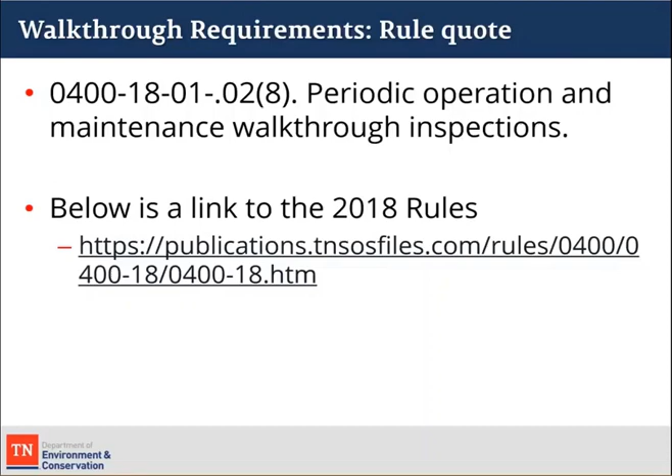A rule quote for this portion of the walkthrough is 0.02, Section 8. If you'd like to see those rules, you can get mesmerized by them if you look at them long enough. A link is below to be able to look at the entire scope of our rules.

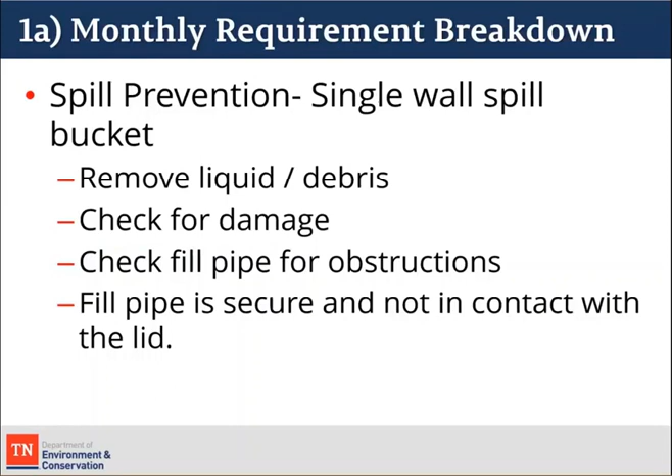All right, so our monthly requirement breakdown: spill prevention for single wall spill buckets. We ask that on our form you remove any liquid debris, check for damage, check your fill pipe for obstructions, and make sure your fill pipe's secure and not in contact with your lid.

Since this form is finalized now, I've tried to include all the applicable sections from this form for each of these sections of slides that we'll go through. So items 1, 2, and 3 on the new form encompass the requirements I just talked about. You'll have a box to initial for each of these questions once you're able to check them off each month. Hopefully this saves everybody a lot of organizational problems as far as keeping up with 4 or 5 different forms—everything is on one form for pretty much everything you have to do at every facility. So again, 1, 2, and 3 goes along with single wall spill buckets.

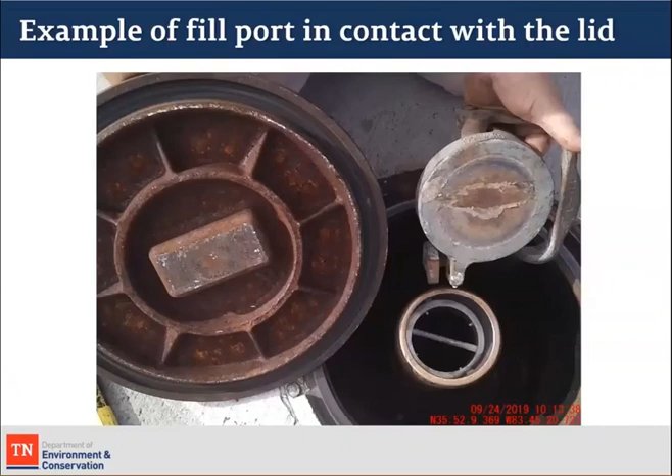All right, so some examples of things you may run into in the field. This is a photo of a spill bucket lid that's in contact with the riser cap—you can see there's some wear on both of them. This is an example of a damaged spill bucket; everybody's seen them, nothing new here.

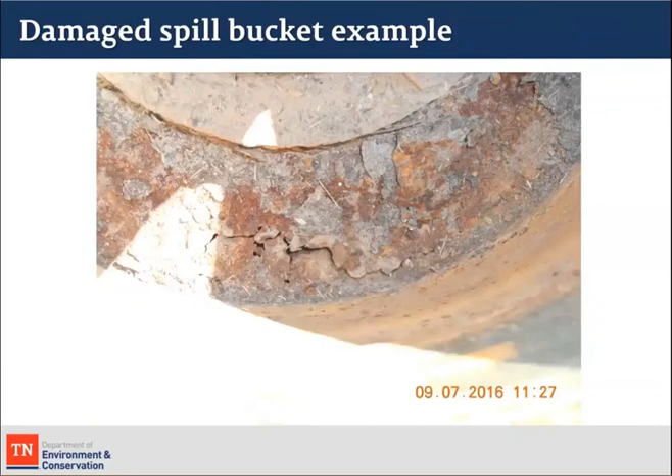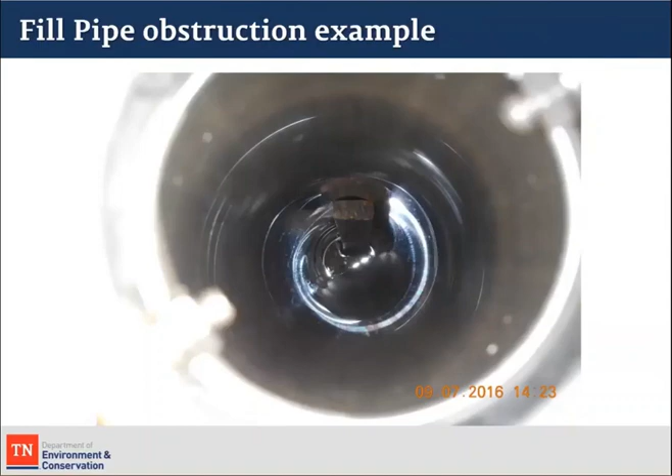If you happen to see a stick or something down in your fill port, you definitely want to remove that and make note of it. There could be anything in there—rags, anything. So check it; this is something that's sort of new, so we want to emphasize that you need to look down in there if you're doing monthlies for one of your tank owners.

Okay, so the monthly requirement breakdown with double wall spill buckets—there are some ways to get out of doing the operability testing. If you have electronic sensors and you monitor them with the interstitial monitoring protocols, and you keep an alarm history and a monthly sensor status report, then you can avoid doing operability testing.

This is also the case with a standalone sensor. If you don't have an ATG and you just have a standalone sensor with a monitoring device just for the sensors, you can also avoid that requirement as well.

The liquid float gauges still will require operability testing. A footnote for all of this is spill bucket operability testing is not part of monthly release detection or monthly leak detection by rule. So it's not the same as monitoring a sump—it's not looked at the same, it's not release detection. Whereas monitoring the sump is the release detection for your piping, monitoring a spill bucket is not the same.

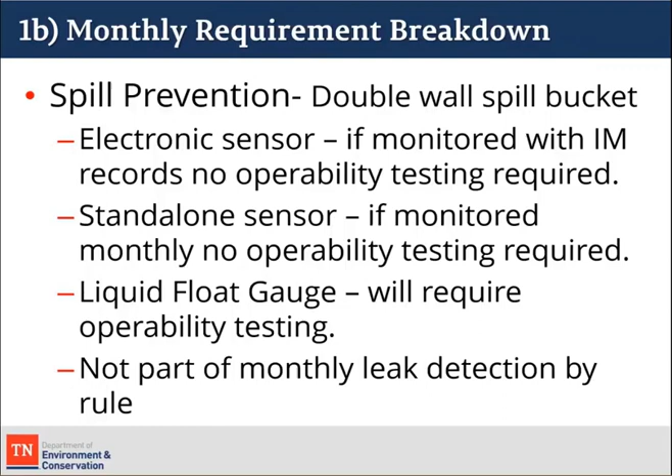I want to make sure I make this as clear as possible: if somebody does mess up, it's not the same criteria. Enforcement doesn't look at it the same, it's not even the same rule, quote, if it is a violation. It's just like missing a month of doing your spill bucket and dispenser logs previously. So it's not like it's a level 1 or anything.

Okay, so for the form, number 4 is the applicable section for this. And like I said, you just finish out the check boxes each month, initial, once you've covered all these questions.

Okay, so this is a double wall spill bucket. Everybody's seen one with the float gauge in it. This one's actually failing, so it would require some attention. The sight gauge in there, I'll reiterate, is not the same as having an electronic sensor in there, and will not keep you from having to do your operability testing on a spill bucket.

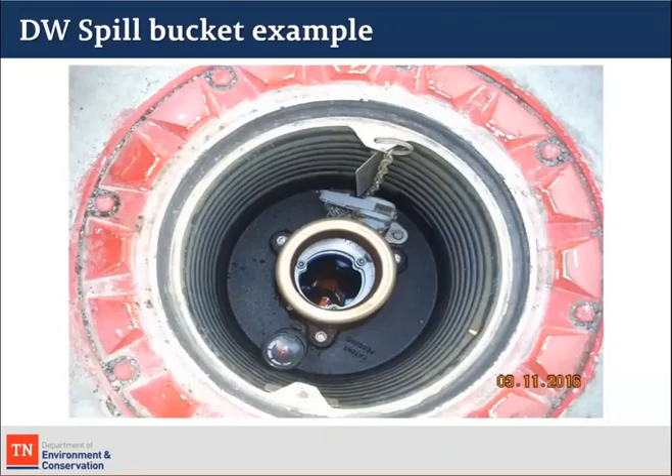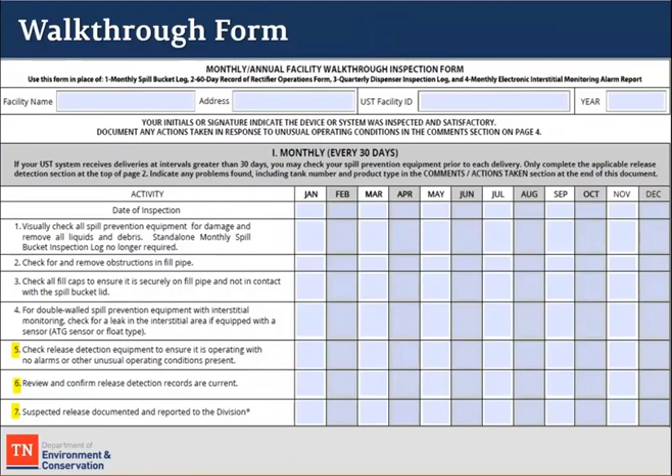So you'll be asked to check release detection equipment to make sure it's operating with no alarms or unusual operating conditions each month. You'll review and confirm that your records are current, and once you do that, you'll check your box. I always recommend keeping all your records with this form if you're doing compliance for a tank owner, because that way when we come, everything's organized and together, and it just makes for a faster and less confusing inspection. Number 7, any suspected releases, document and report to the division as required.

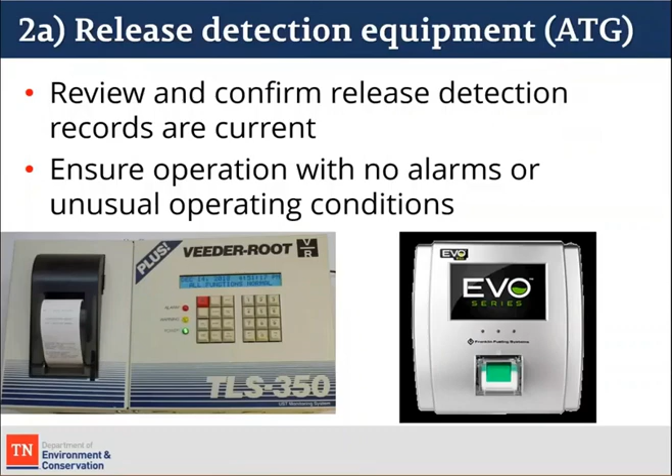All right, so for ATG, you've got to review your release detection records, make sure they're current, make sure you've got a pass for each month. Nothing's changed there as far as the requirements of what you have to have. We just have a spot on our walkthrough form for you to check that you've done that each month now. Make sure no alarms and unusual operating conditions, and make sure to let the division know if that is the case.

For statistical inventory reconciliation, review your reports each month. Make sure your drop tubes are present. I know it's uncommon, but I have seen a couple of times during inspections where a drop tube has been removed for whatever reason. I don't know if somebody steals them for the metal or what, but anyway.

Record your water level readings each month. That seems to be something that is easily forgotten with this method, is to check for water each month. A lot of tank owners, for whatever reason, forget to do that portion.

Also, be sure to include your inventory raw data with your monthly report. That's the sheet that they use daily to record their beginning stick readings, their sales, and all that raw data. Make sure you include that because the inspectors will ask to see that most of the time.

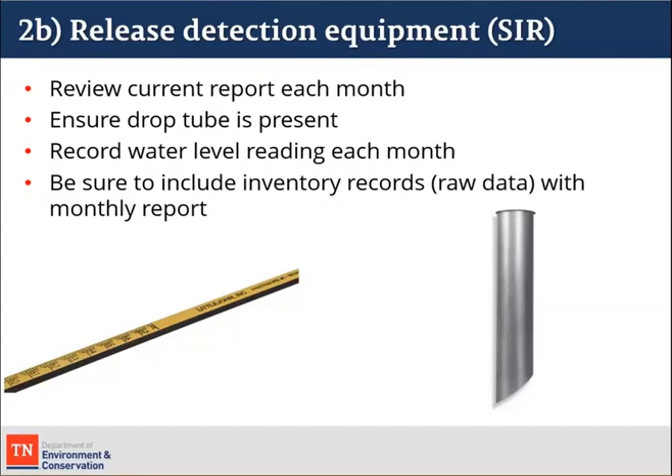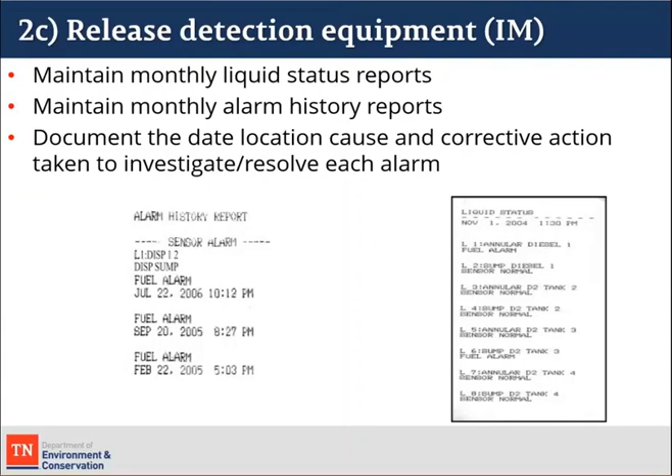Okay, for interstitial monitoring, maintain your monthly liquid status reports and alarm history. Both of those are required. And like I said earlier, I recommend just keeping all that in an envelope with this form. That way, when you're ready for an inspection, you've got everything together, and it's a lot smoother to go through.

Document the date, location, and cause of any corrective action taken for any alarms that you may occur on the back 2 sheets of our annual walkthrough form. There's a lot of extra space for you to document anything you've had to do at the facility. So if you've got, let's say, 5 gallons of water out of the STP sump and reset the sensor, this will be where you would record what you did and how you addressed any alarms.

Okay, manual tank gauging. This is such a rare method of release detection in Tennessee that I'm not going to spend a lot of time on it. If you do have a facility that uses this release detection, I recommend getting with your local field office, contact Don or myself if you have any questions. This chart is straight from our standardized inspection manual to show what qualifies and what doesn't qualify as far as how you can perform this method of release detection.

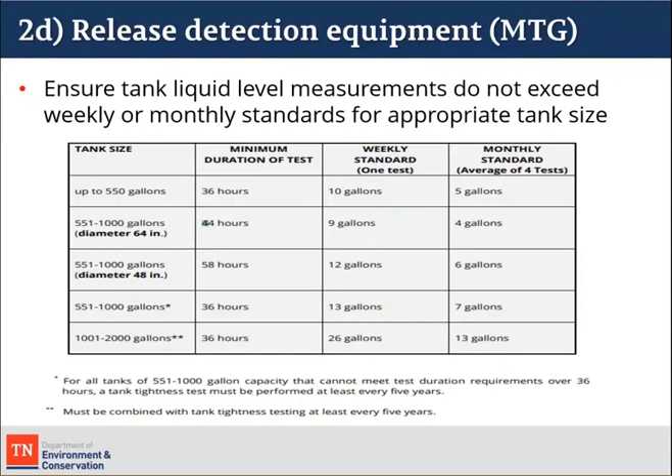Okay, so for the walkthrough form on the monthly section, we've got each method broken down. The form contains everything because it's going to be all-encompassing for every facility out there. So if you have a facility that has an ATG and utilizes that for their primary method of release detection for their tanks, you check the ATG box and then fill out those 2 questions associated with the ATG.

Same thing with SIR. You check that section, and then each month you answer those 4 questions, and as long as you have all that information, you'll meet your requirements. Hopefully this is going to help people avoid violations. Only time will tell on that, but I think it's a lot clearer what's required by having this form. As long as you complete the form, you should meet all the requirements to stay in compliance.

Okay, so interstitial monitoring. Now there are some things obviously that fall outside of that, equipment-wise and things like that. But as far as release detection requirements, everything that's asked for in here will help you meet that requirement.

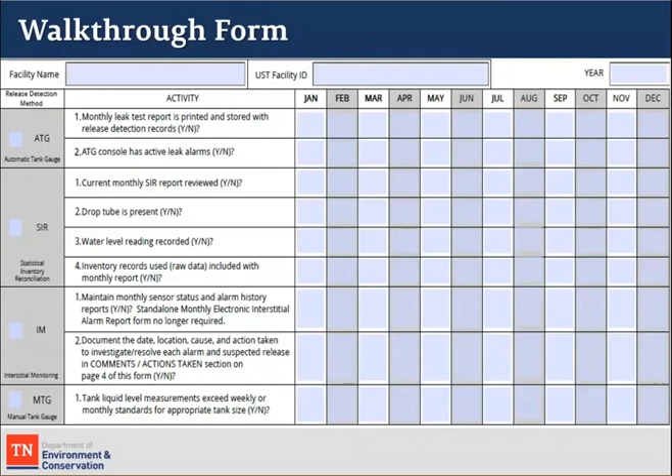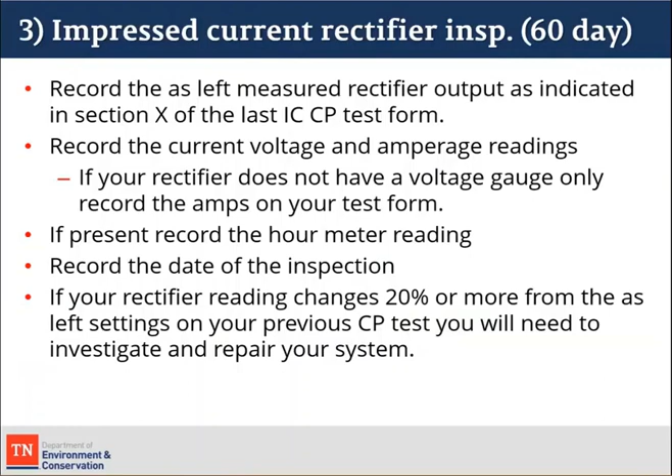Okay, so impressed current. Rectifier inspections are every 60 days. Nothing's changed there. We want you to record the as-left measurement on the rectifier, and I'll go over that on the form in just a second. You also want to include your current voltage and amperage readings that you see the day you do your inspection. If you've got an hour meter, record that as well, and then put the date of the inspection on the form. Also, if your rectifier readings change 20% or more from the time of your last test, at any point during that 2 or 3 year period that your test is valid, you need to investigate and have somebody qualified come out and check that output of the rectifier to make sure it's still protecting the tanks adequately.

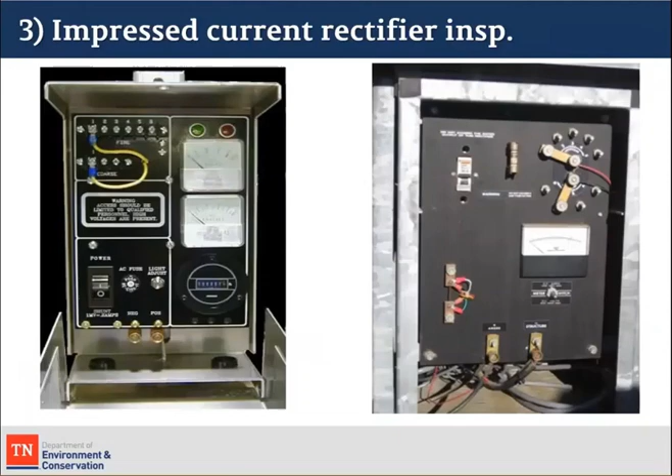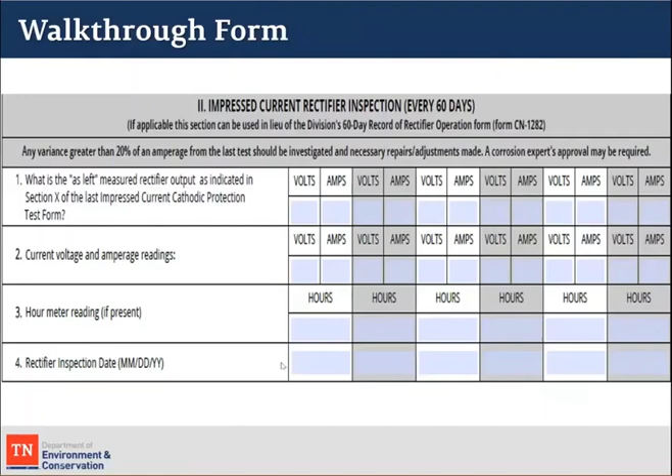Okay, so here's the section on the form that I was talking about. Your as-left measurement will go in these 2 boxes, and you'll just copy it every 60 days because it's going to be valid for 3 years. That number will be, unless you have to have a test, in the interim for a variance of 20% or more. Then this is where you would put the day you're out there, the volts and amps if applicable, hour meter reading, and the inspection date. So that's pretty straightforward.

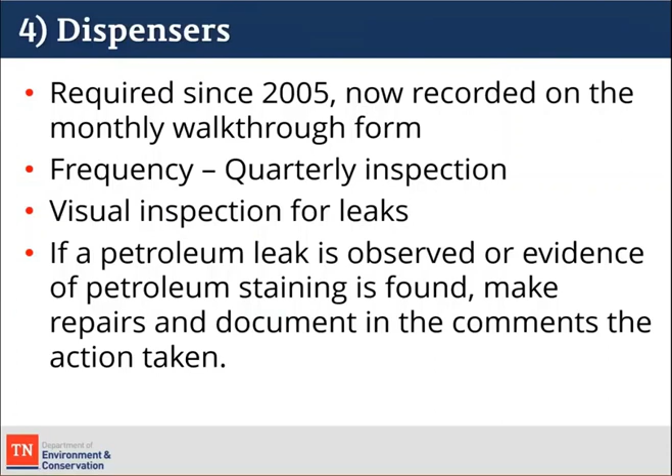Okay, so dispensers, nothing new here much. Since 2005, we've required this. Now we're just asking to record it on the monthly walkthrough form. And then it's a quarterly inspection. That's not changed. I want you to visually inspect for leaks. And if you do see a leak or notice any petroleum staining, make the repairs and document in the comments what you did to make that repair.

This is just an example of a potential scenario that you'll run into with a leaking diesel dispenser. It's got a couple of seals that have probably gone out somewhere. You get a little drip here, and one hanging from each one of the bolts on the bottom of the meter.

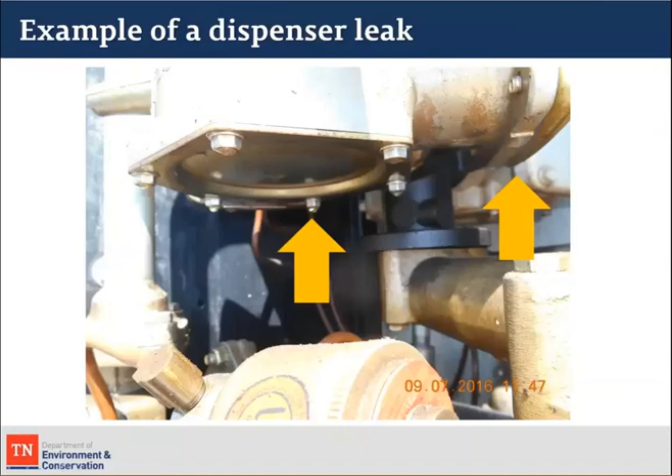So this is the portion of the form that involves the quarterly inspection of the dispensers. It's pretty much the same as the previous form, just in one smaller section on our walkthrough form. We just ask that you initial and date the day that inspection is completed.

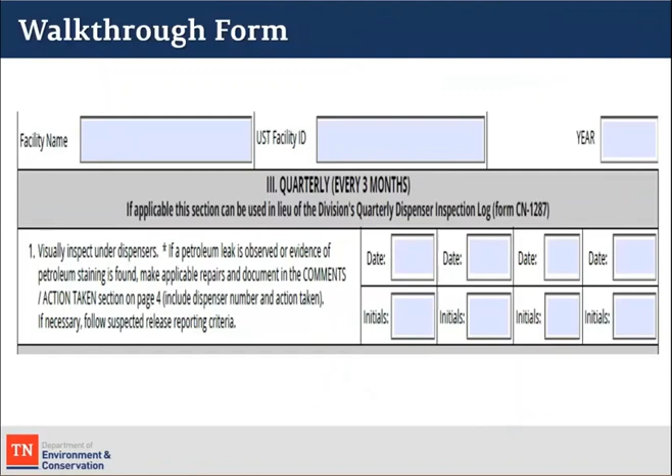All right, so jumping to annual requirements. We've finished all the monthly requirements. Mark, was there any questions in the chat or anything on the monthly before I jump to the annual section?

My mouse went away for a second. No, I do not see any questions so far, so perfect. Thanks for the pause, but carry on. Awesome.

All right, so annually you need to check for damage of the floors, walls, and the lids of the sumps, any seals, boots, penetrations, cracks, any separation. Most importantly, and it's overlooked quite often, is that the sensor is located at the lowest point portion of the sump. A lot of times, on this bottom right picture here, you'll see there's an elevated section where all your risers come out of the tank, and you'll see that sensor sitting there instead of on the side where it should be. That gives you about 4 or 5 inches of liquid in there before it ever gets to the sensor to activate it. So we ask that you set it at the lowest portion of the sump so it can be alarmed as quickly as possible.

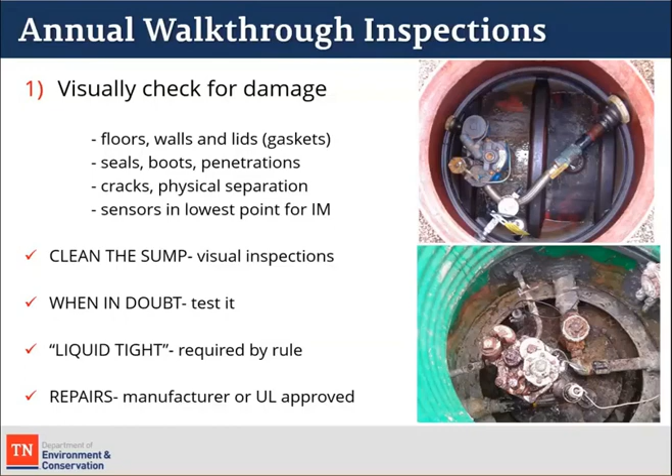Also check your penetration fittings, piping joints, conduits where it enters the sump, pump risers, lids, gaskets, test boots - make sure they're open. Close them for your hydrostatic test, obviously, but once you finish the test, make sure you open everything back up so you've got an open system again, because if you forget to do that, it just opens up violations whenever we come around the next time.

Also, compatibility is a pretty big thing that we're starting to look at more than previously, to make sure ethanol percentages are on the rise - not necessarily in Tennessee yet, but E15 is pretty much in every state that surrounds us. For whatever reason, we don't have it here yet. But flex fuel and E85 blends have been around for quite some time, so there are compatibility issues with upgrading existing tanks to anything greater than 10%. Make sure you check all that before you switch somebody over.

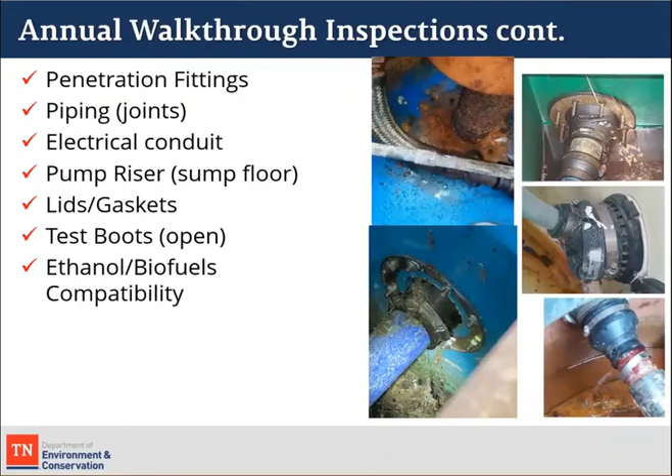Piping degradation is something we're starting to see with pretty much every flex pipe manufacturer that's over 20 years old nowadays. It's just starting to degrade, either by being in contact with water often, or product in the sump. But for whatever reason, we are starting to see more degradation of the flex pipe that's in the 20 to 30 year range of age.

Typically, you find this in sumps without sensors, obviously, because if the water or petroleum is causing it, a sensor would alarm, and you would be able to remove that a lot quicker than if you only look at it once a year.

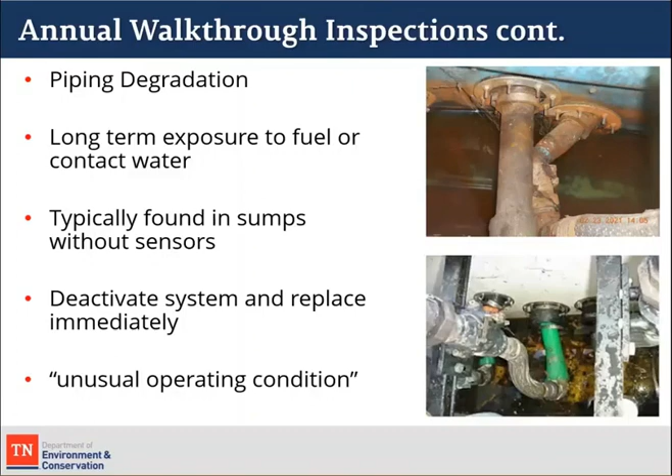An unusual operating condition is not just the pumps are running slow. Visual or performance based, it's clearly defined in the regulations with examples. But if you see it and it's not right, report it. That's the basic premise trying to be accomplished there.

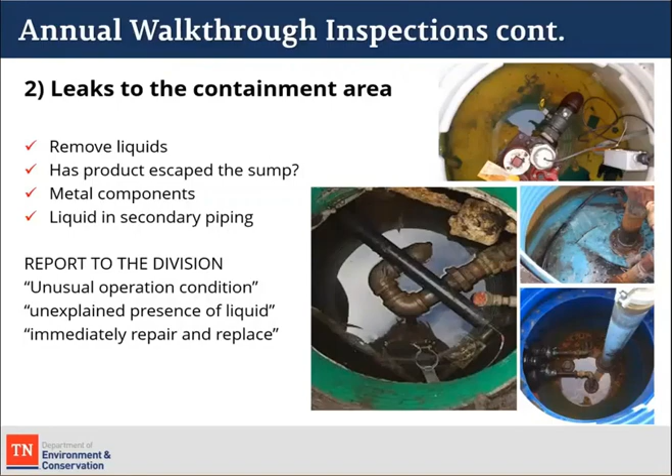All right, Dustin, could you advance the slide for me? Again, or did it should not go through yet? Well, this one, or this, keep going. One? Okay. I haven't went this far yet. Okay.

Prior to conducting a secondary containment inspection, I think Dustin's been pretty thorough about covering this previously. How can you, it's impossible to know what's in that sump unless you can visibly see it. So we've preliminarily seen some walkthroughs conducted on sumps where our inspectors can't even see the sump floor. That obviously is an issue. Questioning the integrity of the sump is difficult to do if you can't see it at all.

So we're encouraging people to clean those sumps as practically as possible. Talking under dispensers, filters, anything that's in there that's loose or doesn't belong there needs to be removed. And secondary containment boots should be in place and open to the piping.

Secondary containment, that's a critical component of interstitial monitoring. If the secondary is not open for communication to the sensor for liquid to flow through, then you're ultimately not going to be able to detect a release in that containment.

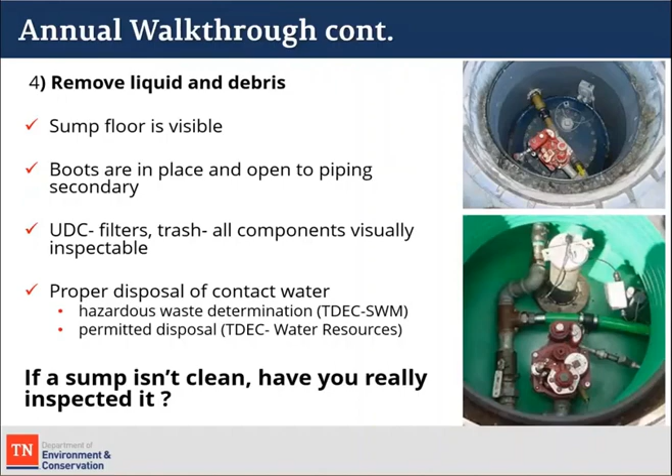Another option that the industry has brought forward is the double wall containment sump, which we don't see a lot of in Tennessee at this time. It is beginning to be a commonly seen technology as we see more larger systems get installed statewide, because double wall containment sumps do allow you to avoid the triennial testing requirements for containment sumps.

This is as long as they are monitored with a mechanical or electronic sensor using one of the technologies, either with a brine filled secondary or vacuum filled secondary, instead of hydrostatic testing on those sumps.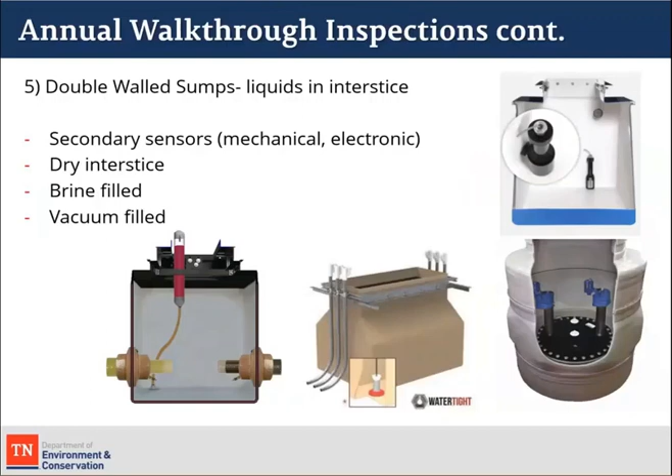One of the components of monthly leak detection for a site that's using SIR is, of course, a gauging stick, and this really should be present at every facility. It's a critical component for receiving fuel deliveries, knowing your before and after stick reading, and the tanker doesn't always have one on it. So if you want your drivers to give you accurate deliveries, that's the main reason for mentioning it here.

We realize most of the modern facilities doing interstitial monitoring or tank monitoring are not required to have a gauging stick. But if you do have one, check it regularly, make sure that it's legible, the button's present on the bottom, and that the lacquer coating on the outside is still intact.

Verifying the tank chart is specifically for sites conducting SIR, but it's a recommended practice for anybody. Checking with water finding paste and ensuring that the site has a calibrated tank chart is a critical part of the walkthrough requirement on an annual basis for a site that does SIR.

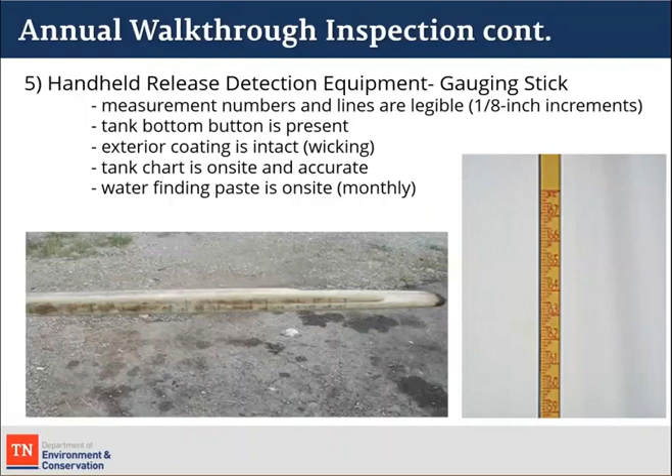Don, I do have a question. Sure. From Michael Koblitz: is it the contractor's responsibility to report the issue?

Well, the regulation is specific to owners and operators. So as the rule is written currently, the owner and operator is primarily responsible for reporting issues to the division. I assume Michael asked that question because if they do encounter an issue, are they required to report it? The answer is they're required to formally notify their owner and operator that there's an issue. Then the reporting requirement falls on the owner, not the service provider.

Hope that answers your question, Mike. All right, let me open this mic up. Michael, I think I've got you unmuted now. Okay, well, I will respond to him in chat, in Q&A.

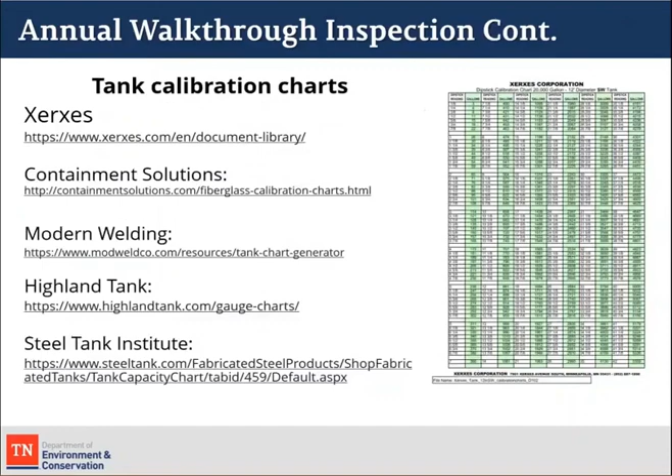As we mentioned during previous presentations, SIR is still a critical leak detection method in the state of Tennessee. It's in use in approximately 30% of our sites.

As owners use SIR, they found that throughput is a critical component. More gas that goes through a system, typically the less stringent, it's still an accurate method and still meets all certification requirements. But as the throughput on a tank increases, you're subject to less and less stringency with this method, just as you are with any others.

If you have a site that's selling 8,000 gallons a day, a 30-gallon loss is much easier to miss, even with accurate stick readings. So that's why we ask

all operators to be thoroughly familiar with this process. I know it's part of A/B operator training. If it's not part of C operator training, it certainly should be. Hand in hand with the gauging stick, tank chart, and water paste, every site should have one. Every site should have their operators trained how to use them.

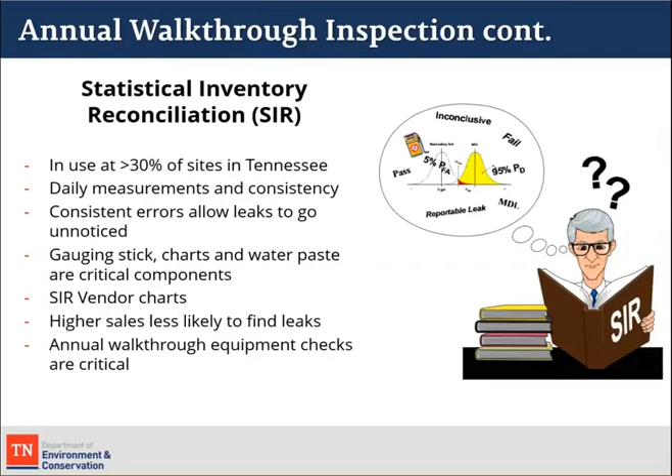The annual walkthrough requirements on these are just as important as checking the tank. Visually checking containment sumps for damage, that's always a priority. Removing liquid and debris from those containment sumps where it's found should be done as soon as practical. And if monitoring is being performed, be sure to check for leaks between the double wall containment sumps.

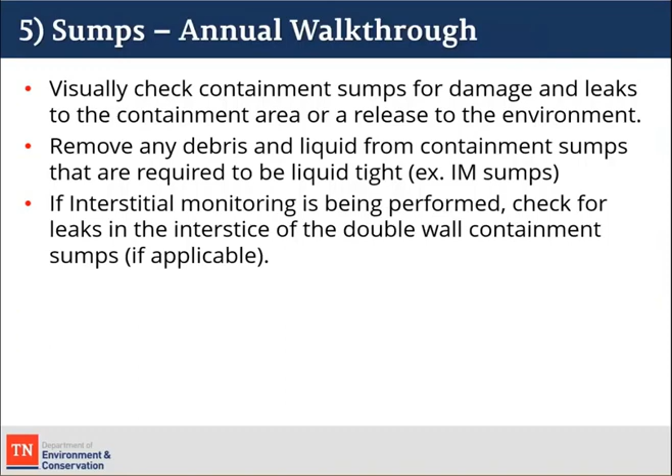I think I've had this discussion before with several owners and operators. If you have a monitored containment sump, then... I just drew a blank on why this slide's still even in this one. Go ahead, Dustin.

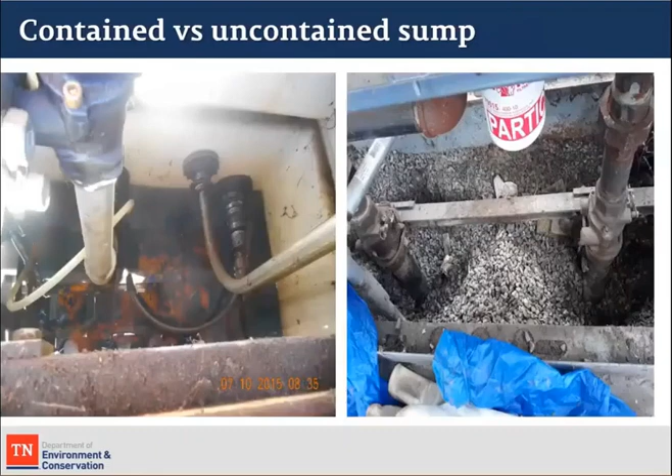I think I remember now, because what we're talking about here is eventually we're going to get into the reporting requirements. Standing liquid of any kind in a sump whose integrity has not been verified -- if I look at this example on the left and I see that liquid goes up to the lowest penetration fitting in that sump, this site may not have a sensor. If that's the case, then we have to have a procedure in place, such as hydrostatic testing, to verify that this containment sump did not release liquid fuel into the environment. Obviously, with the one on the right, any evidence of staining or a significant amount of leak may warrant the inspector to investigate further.

This is a question we get a lot from contractors that have piping, flex connectors, swing joints, or any metallic piping component that's in contact with water in a containment sump. Is that sump used for interstitial monitoring? If not, then maybe the addition of cathodic protection is the only necessity. So if that sump was installed before July 2007 and that piping system is not being used for IM, then your only priority at that point is ensuring that the metal components in that sump are protected.

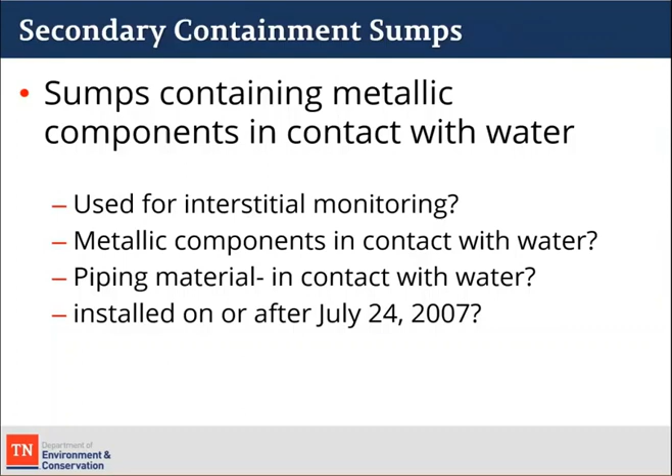Record keeping requirements for all this testing that we're requiring now: annual line tests are currently required to be maintained for 1 year. For suction piping systems, line testing is required every 3 years, so you'd only be required to maintain the last single test. For mechanical and electronic line leak detector systems, 3 years.

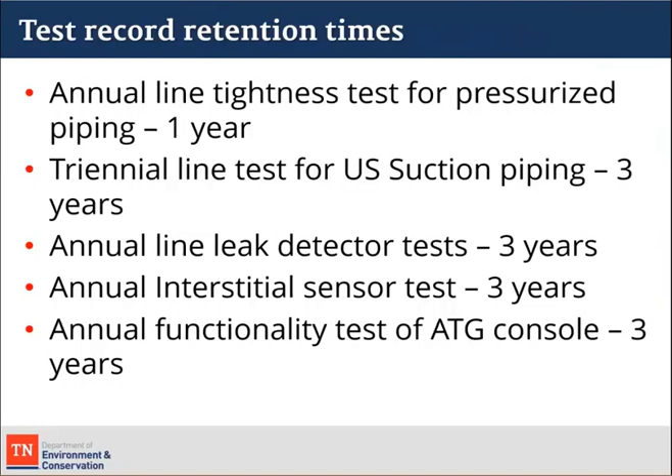Those records should be maintained beginning at when our implementation period begins. So the new regulation requires that those records be maintained for the last 3 tests. Same with sensors and console testing.